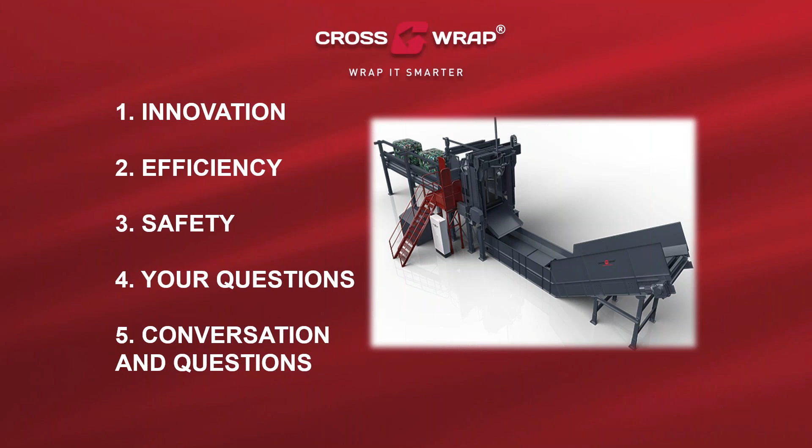So we got one question from the audience when registering: what is CrossWrap dewiring? I hope you will get the answer during this presentation.

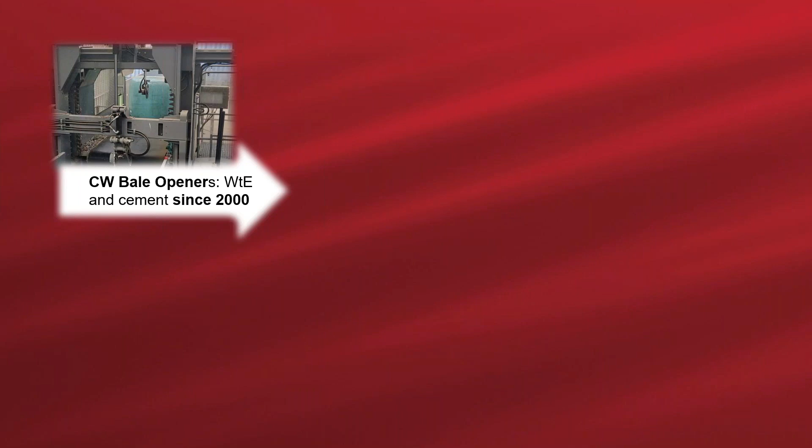Innovation. Let's go through a short history behind the dewiring. Since 2000, we have been delivering the CrossWrap bale openers to the waste-to-energy and cement industry. In these industries, our references are Intercement, Cimentas, and LafargeHolcim, etc. This machine opens the bales with wires and plastic.

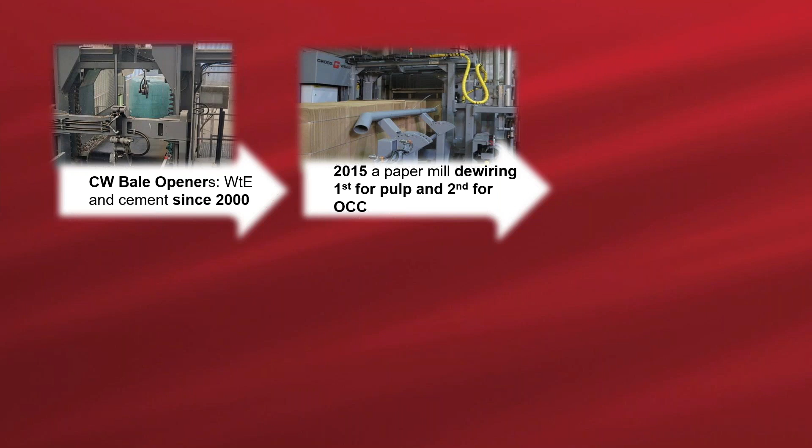Then in 2015, we got a request from a paper mill to do a dewiring based on our bale opener for the national pulp bales here in Finland. After that, we did the second machine for OCC bales, also for the paper industry.

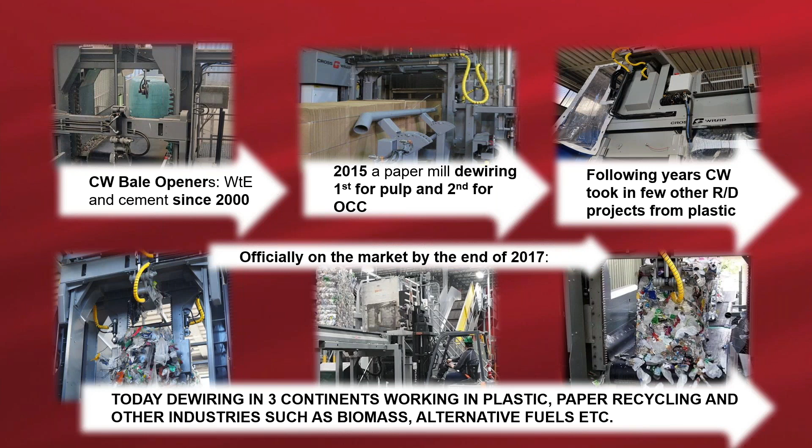After 2015, we took some projects in from the plastic industry. By the end of 2017, we had a full product, CrossWrap dewiring, on the market, opening and dewiring the bales for plastics recycling, paper recycling, and other industries such as biomass and alternative fuels.

Today we have this machinery on 3 continents. We can proudly call ourselves the leading dewiring on the market, since we are the only dewiring that is cutting, removing, and coiling the wires of the bale in 60 seconds, and we are highly recognized in many process industries.

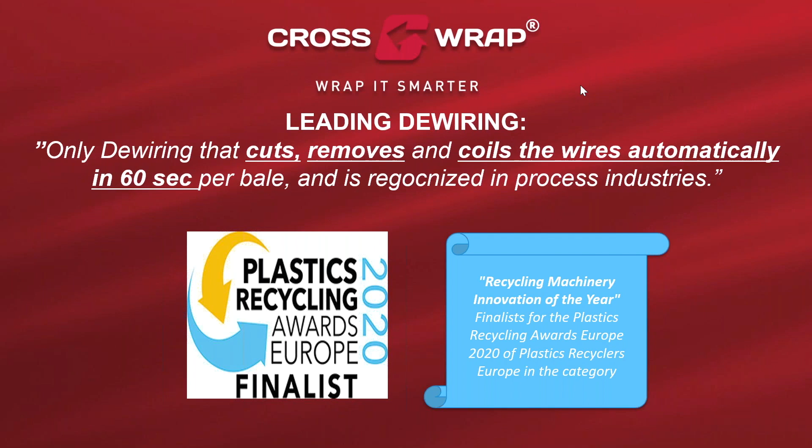Also, this year we are proud to be shortlisted as a finalist for Recycling Machinery Innovation of the Year 2020. Unfortunately, the final was postponed, but we are looking forward to that as well. Without further ado, let's have a look at the dewiring machine in action.

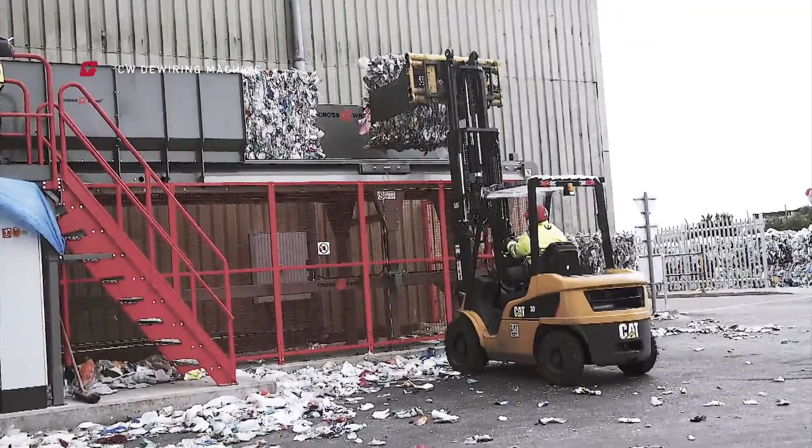This is an installation in England. Rainham Veolia is the client. So we feed the bales to the feeding conveyor, and we run the bale into the dewiring unit.

Then we have the grippers coming from both sides, taking hold of the wires. Then we start cutting with the slow rotating cutting blade in the front, starting from below the conveyor belt, ending above the bale. Then the grippers move apart. We run the conveyor, and the material goes further to the next process. Then we let go from the other side, and the wires get pulled to the other side, into the coiling unit.

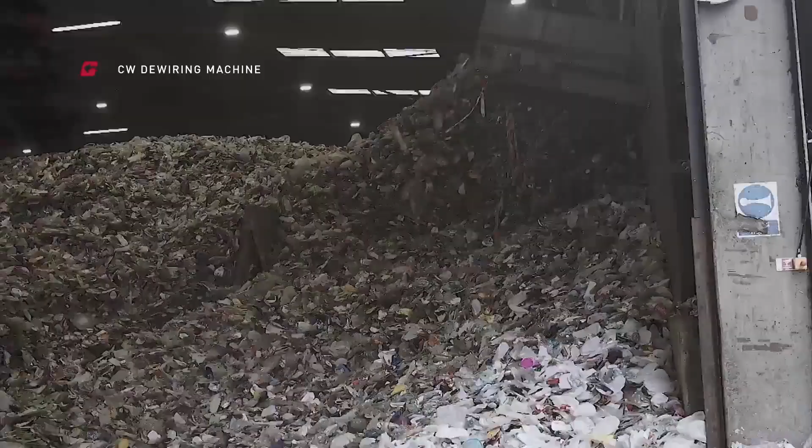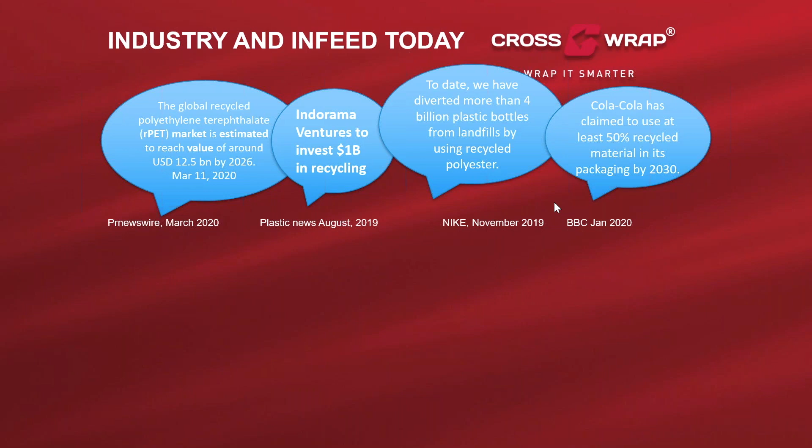Circular economy, social responsibility, and sustainability are here to stay. Brands and companies are making long-term commitments to plastic recycling. The lines, processes, and facilities of recycling are highly automated.

However, the feeding of these automated processes is often well behind in development, based on manual solutions or solutions adapted from other parts of the process. So now is the time for revolution in the feeding of these lines and processes, to the level of our industry. Let's see how it's done, Cross Wrap style.

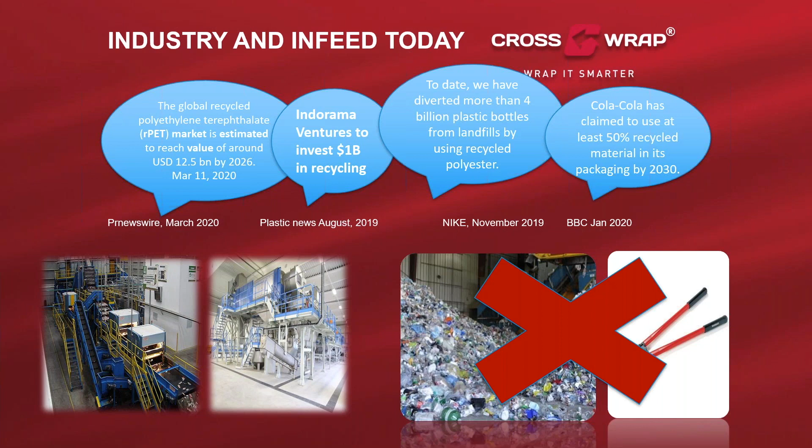So many times our feeding of the line may look like this, losing a lot of time in cleaning, manual cutting, manual handling of the wires, and so on. How about if instead it could look like this?

Efficient material handling, the consistent feed 24 hours for our running process. The most expensive time that we can have in the facility is downtime.

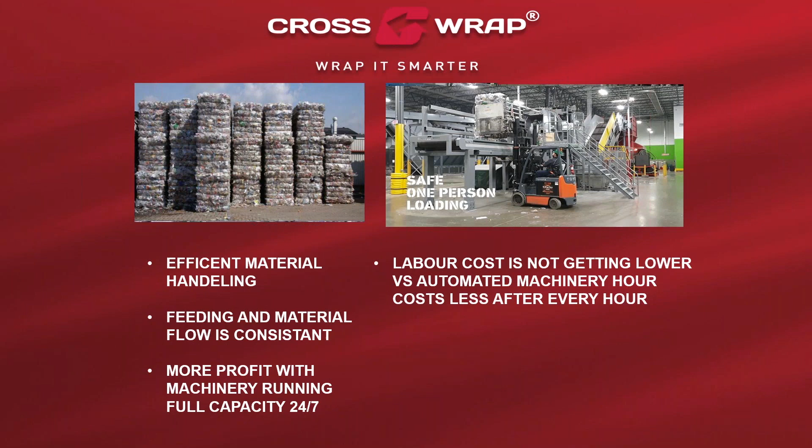As the current situation shows us, automation is the only way to go when possible, especially when talking about waste-based material streams. The working labor cost is increasing every hour, but the automated machinery costs less and less every hour. Now automation is possible for the dewiring process as well, with Cross Wrap dewiring.

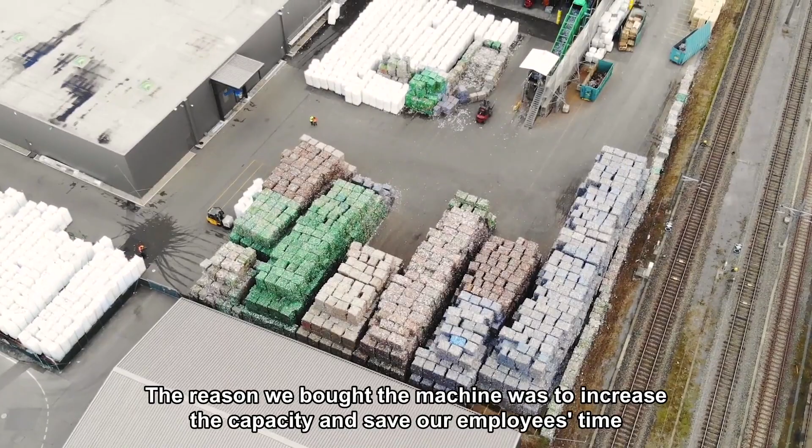But better than me telling you, let's hear from our customer why he made the investment for Cross Wrap dewiring. The reason for us to buy the machine is to increase capacity and save time in people.

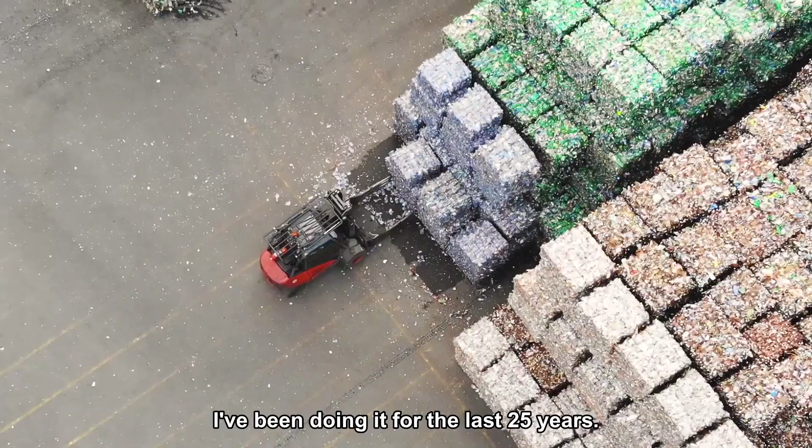My name is Casper van der Dunger, working for Poly Recycling in Switzerland, a PET recycling facility, as managing director, doing this for the last 25 years. We are actually at a new build plant since one year, and we are happy to integrate a recycling facility into preform production. So we make, in one location, old bottles into new bottles.

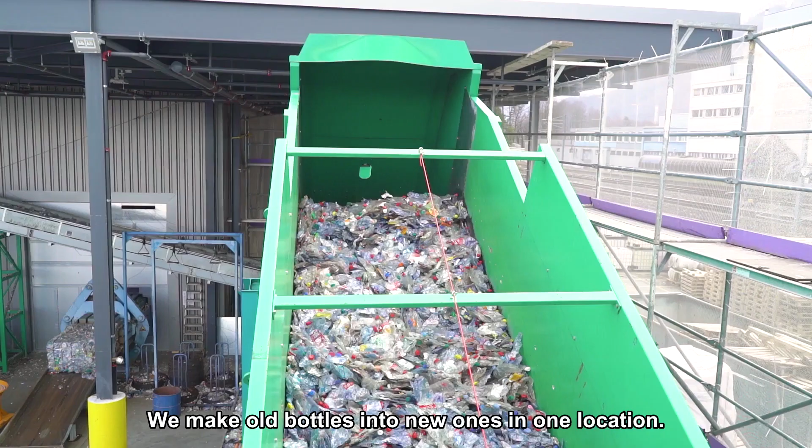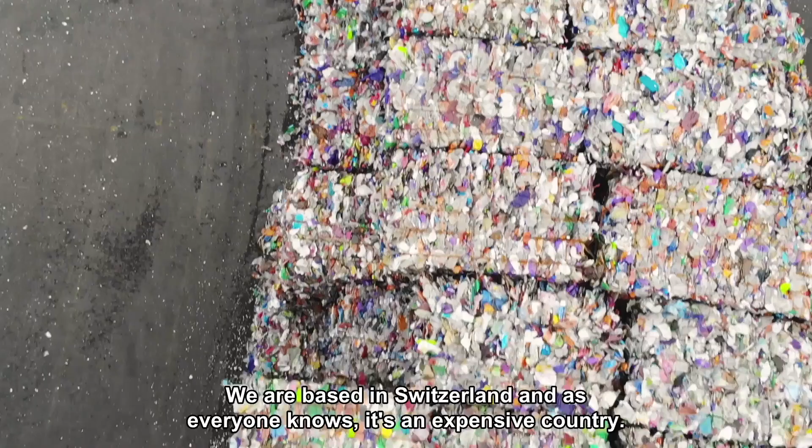It's a very unique situation because you go from waste into food grade materials. As we are based in Switzerland, everybody knows it's an expensive country, so we are focused on automating as much as we can in our operations. The dewiring system of Cross Wrap was, let's say, a point of choice where we wanted to focus on what it could add for our location.

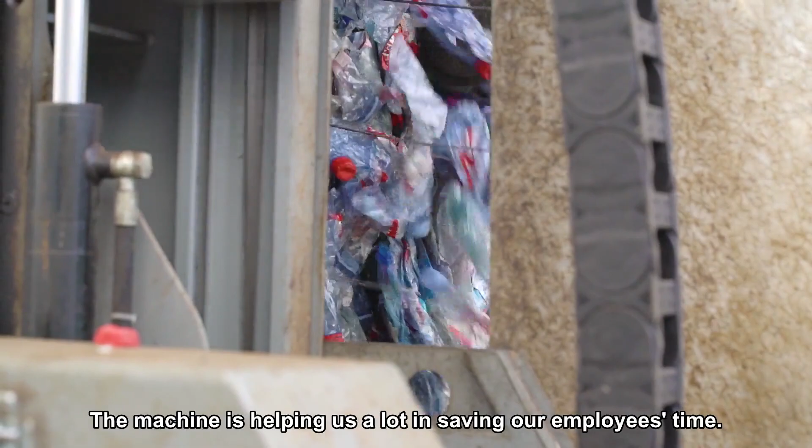The automation of bale dewiring gives the employee more time to do other important jobs, and the machine is helping us a lot in saving time for this. This helps us with the efficiency of operating a line 24/7 and focusing on making Swiss quality.

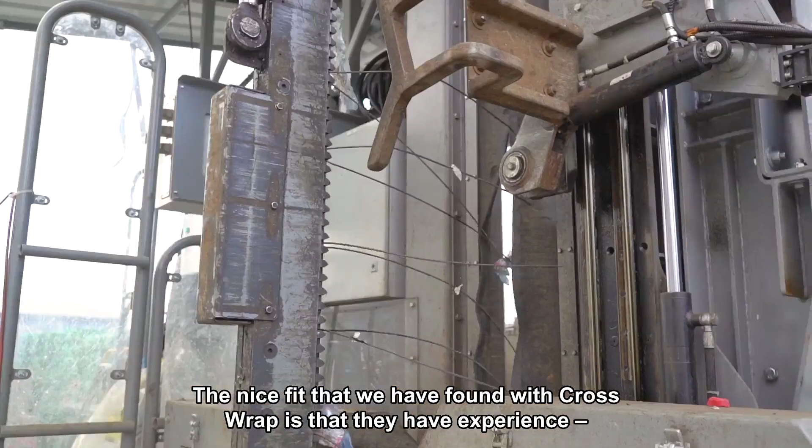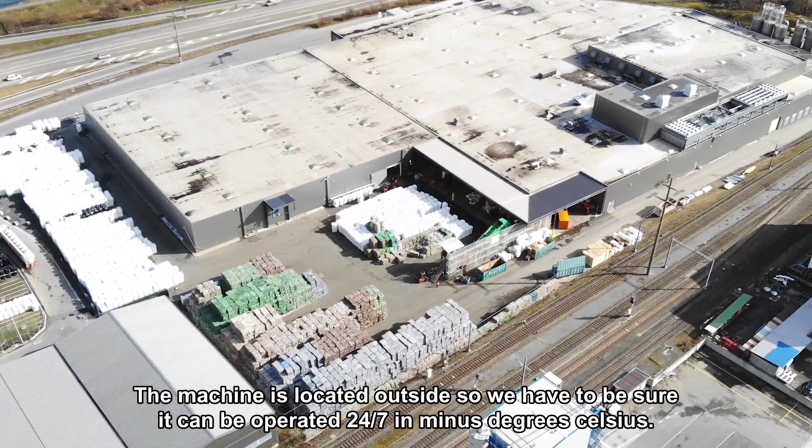The nice fit with Cross Wrap we found is that they are making machines and have experience in countries where there is a lot of snow. We typically have the machine outside, so it has to be sure that it can operate 24/7 at sub-zero degrees.

What I did like about the contact with Cross Wrap was that they were looking for value-added sales to the customers. They wanted to understand what we require, and we were, let's say, helped very carefully in achieving our goals. So, thank you to Switzerland for these comments.

Last but not least, at this presentation section: safety. Sustainability is a big part of the plastic recycling industry, and one part of that is social responsibility. And of course, the first responsibility is the employees you have on site, and the safety of those employees.

Here are the common tools used for manual bale dewiring, but those should be left to the previous decade. Let's put safety first - no more manual wire cutting and manual handling of wires, which cause several injuries throughout the year in the industry, giving a bad reputation not only to the company but also to the industry.

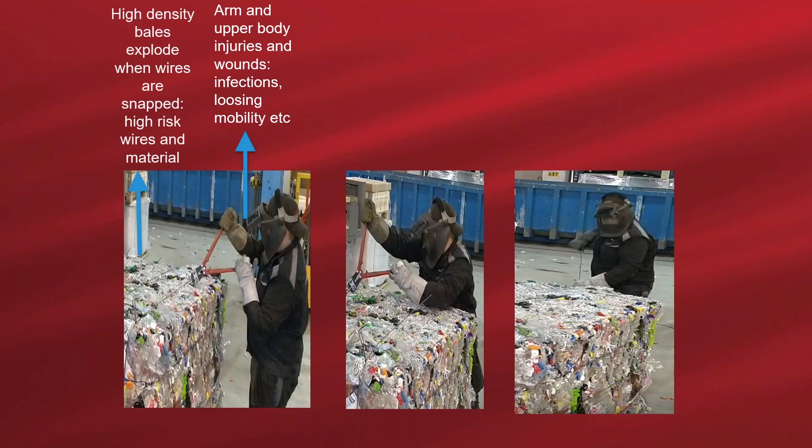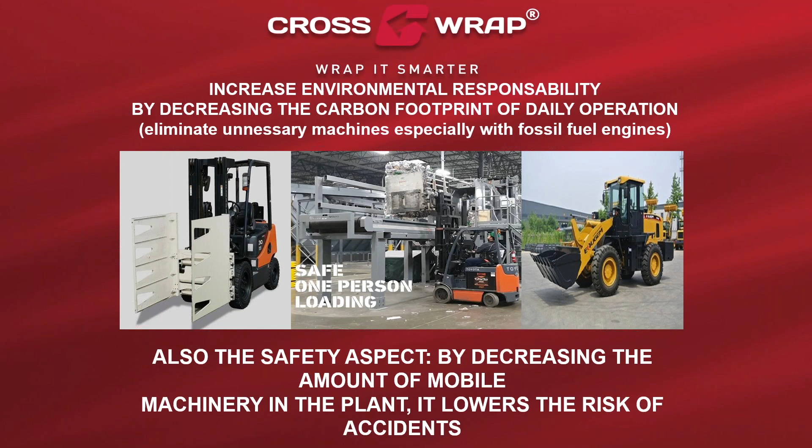Then from another point of view, when having non-automated or semi-automated feeding of our process lines, there is normally mobile machinery moving, mixing, and handling the material, causing safety risks, especially if the plant is in a hurry or behind schedule. And of course, the second thing is the environmental aspect of it all, that we are using fossil fuels. So let's increase environmental responsibility and social responsibility, and decrease both the accidents and the fossil fuel engines.

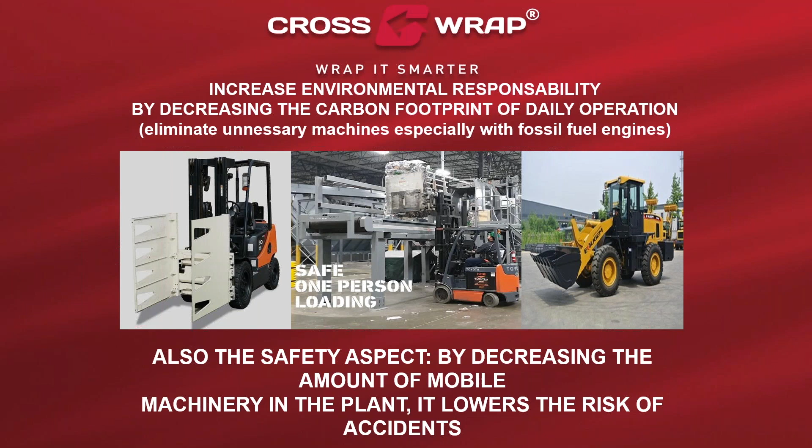All right, so that was just a bit to wake you up, and the rest of the presentation I will be answering the questions you already provided me in your registration forms.

So first up, there were some questions coming during this presentation already. What is the capacity? How efficiently do we remove the wires, and is there fire risk caused by the cutting blade?

The capacity of the machine is highly depending on your process, and we will match it. Now we can do the capacity up to 60 bales per hour. About the wire removing percentage, that in practice varies from 90 to 98%, and it highly depends on the quality of the bales. For us, the most important thing is to have the wires horizontally at the side of the bale, so that we can catch and grab them.

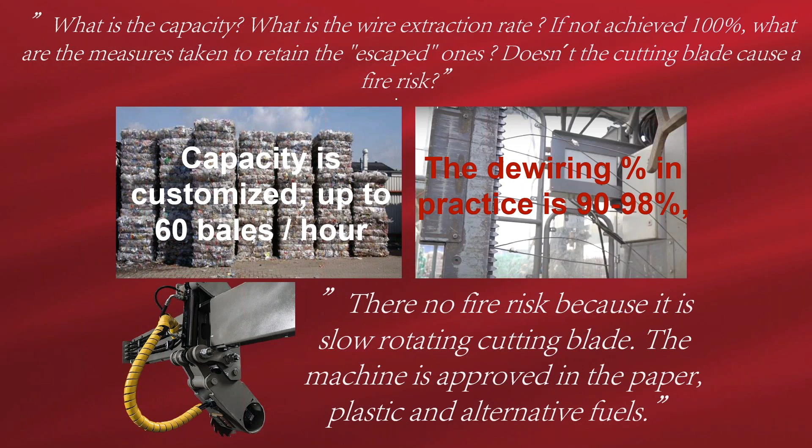Second thing about the fire risk of the cutting blade: no, there is no fire risk since it's a slow rotating cutting blade. Also, what proves our safety of the machinery is that this is approved in the paper and alternative fuels industry, where the assessment of fire risk is high.

And a new option, I like this question of: if not 100%, what are the measures taken to retain the escaped ones? So for this we have a new option. A metal detector is introduced to the CW Dewiring installation itself. Not only do we sense the wires going to the process, but we also can sense the metal that can be in your material stream inside the bale.

Then about different sizes and different kinds of bales, of course you get the bales where you get the best quality and best price. So how can we know? We can open them all. As some of you know, our first product to the market 25 years ago was the square bale wrapping.

These square bale wrappers we have with all the leading baler manufacturers. So we know the machines that make the bales that arrive to your plant. As long as the wires are horizontal, with these two different dewiring models, we can open your bales.

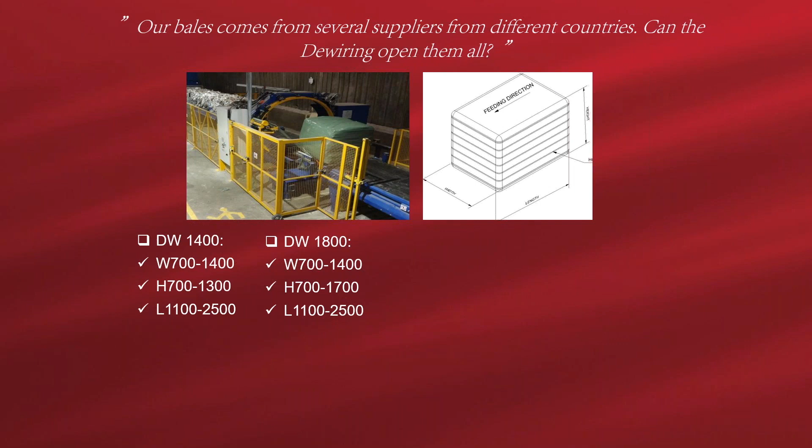And on top of that, as we know, there are different sizes of bales, but there are also different hardness and pressures in the bales. For this, we have developed an automatic bale hardness sensing quality to the machine, so that we can feed different types of bales in whichever order you want, according to your recipe for your product. If we put quality 1, 2, 4, 6, 7, we can do that and have a flexible, efficient process.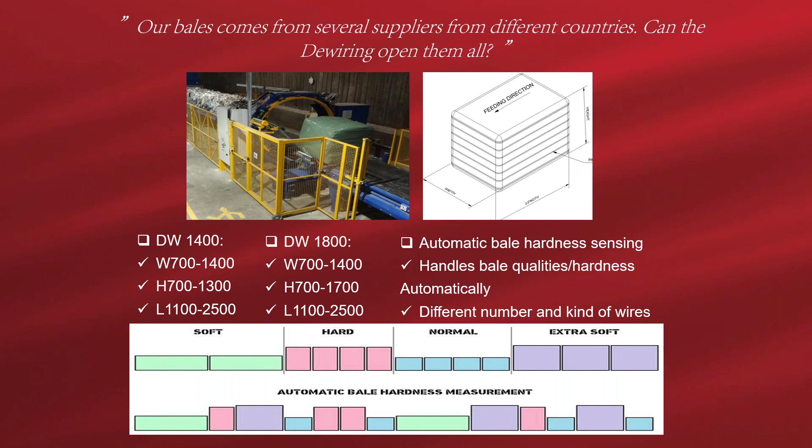Then there was a question: can it change from one product to another using the same unit, plastic and steel? Yeah, we can. This is programmable, and depending on the process, we can do that indeed.

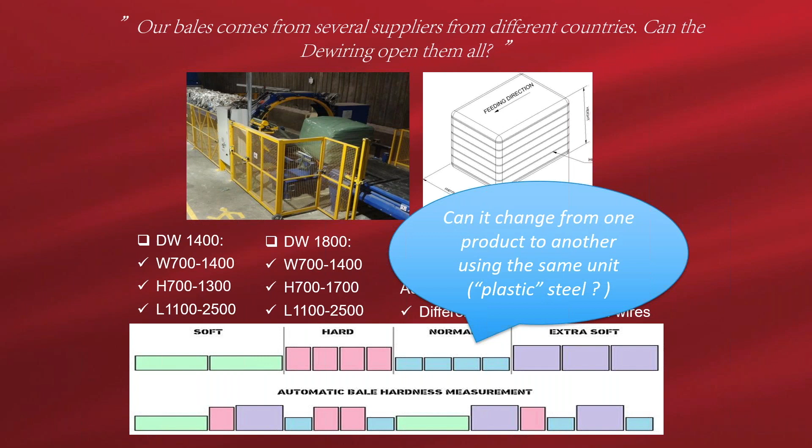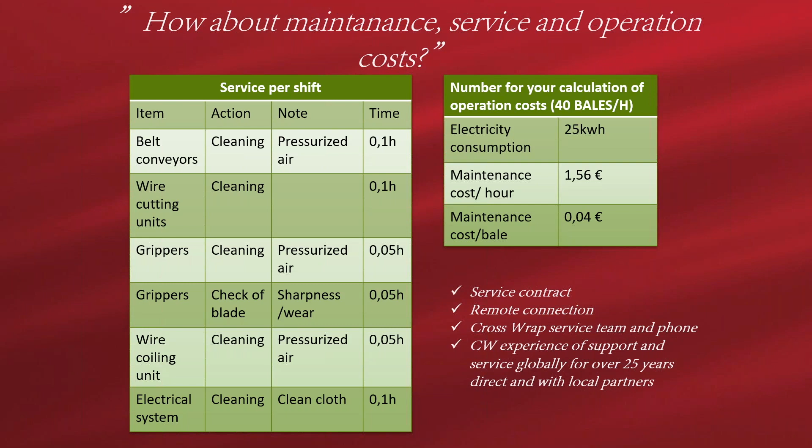Cross Wrap has the experience of supporting international clients for 25 years. We support the clients directly, as well as with local partners. We have a service team and a service phone. All units come with remote connection, so program and PLC related service we can do remotely from our home office as well. And service contracts are available.

A little bit more about service and maintenance, because it seems to be the hot topic according to your questions. So let's take the machine part by part. The main frame, as said, the main maintenance is cleaning and greasing.

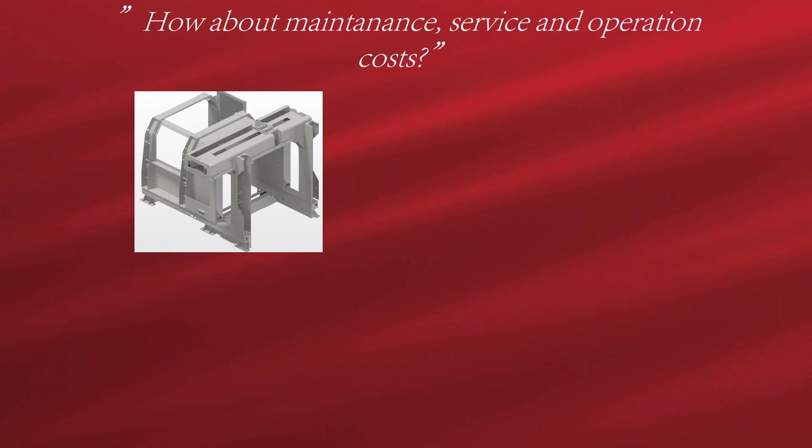The main frame is a laser-cut robust structure, minimizing littering and cleaning. The installation is easy and fast, taking 5 to 7 working days. And we do the factory testing for all of our machinery here in Finland, in our facilities.

Then we have the front cutter. Again, the main maintenance is cleaning and checking the sharpness of the blade. The design and material of the blade is optimized for minimizing the service cost. One blade can be sharpened 5 to 6 times. Normally our clients have 2 blades, one in use and one already sharpened.

The changing of the blade takes 5 to 10 minutes. It's a really simple procedure for any of your operators. But of course, the frequency of changing the blade depends highly on your production and material.

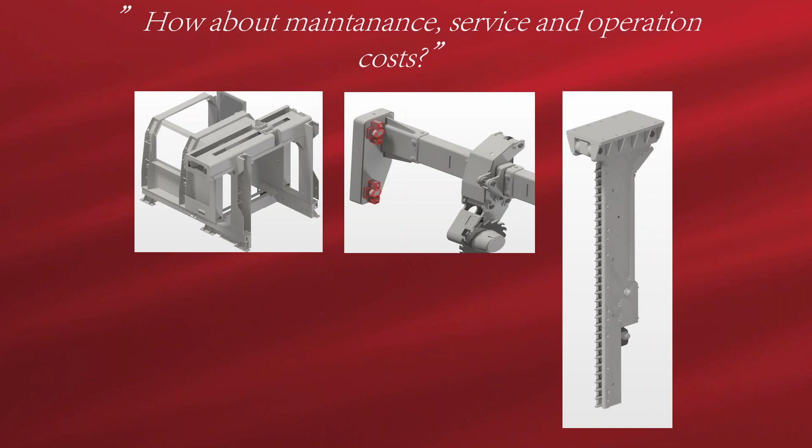Then the grippers. Grippers are patented. We have the patent for the grippers. The main maintenance is cleaning and greasing again, and checking the sharpness.

A nice thing for maintenance is that the spikes are individually interchangeable and replaceable. So we can take one spike from the top or below, where we don't get that many wires normally, and change it to the middle, where we always have a wire and where the spikes wear more.

About the gripper and front cutter booms, again, greasing and cleaning. We use heavy-duty steel rolls for the movement, so we have the same robust structure as forklift trucks. At least for me, I don't know a stronger structure than that.

Then for the coiling unit, last but not least, we hold the patent for that, and maintenance is cleaning and greasing. It is a protected structure, and in the design, one of the best qualities is that we do not generate any heat when coiling the wires.

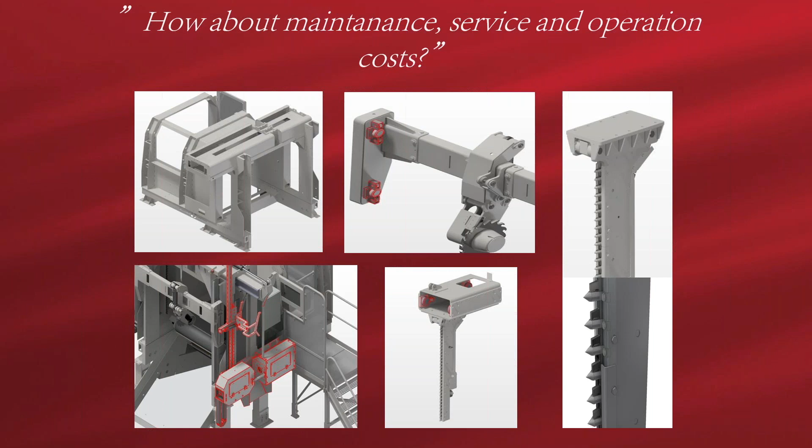We got a separate question about how often we change the cutting blades. As said earlier, it truly depends on your material. This question came from the cement industry. I know we're talking about SRF or RDF, alternative fuel, where the bales are not hard material. There we can say the blade can last around 5,000 working hours with a capacity ranging from 20 to 30 bales per hour.

But of course, if we look at the market, for example in the US, where we have high dense bales made with twin ram balers, where the bales are like rocks, the maintenance sequence for sharpening the blade is shorter.

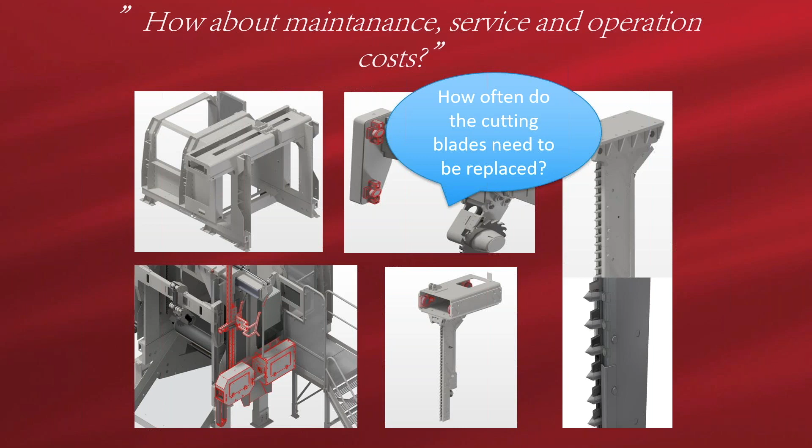Then came a question: our plant is limited with space, what is the footprint of the dewiring? The dewiring unit itself is less than 4 meters long and less than 5 meters wide.

Then we can add the feeding conveyor and output conveyor depending on your project and layout. The length of the feeding conveyor depends on how long a buffer you want for your process.

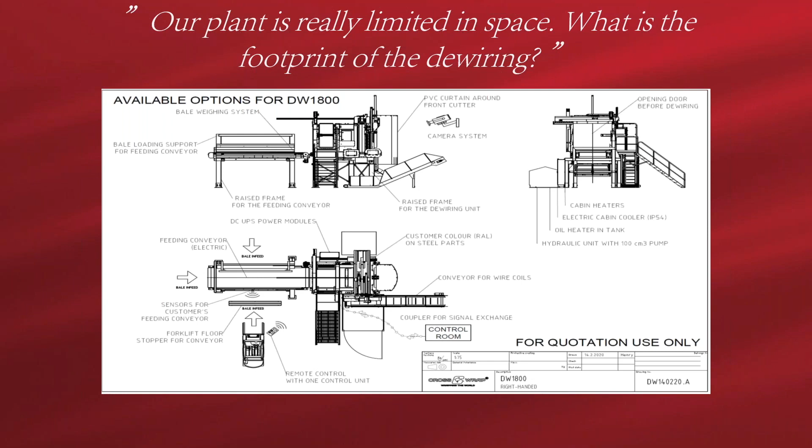Additionally, for example in this layout, we have a conveyor underneath where the coils drop. That is a good solution as well for efficient wire coiling handling after the wire coiling.

How easy can it be to integrate existing debaling and feeding system of a kiln calciner?

As said, our layout is highly flexible. We can have the dewiring directly towards the next process, or at an angle of 90 degrees. The feeding conveyor length is flexible, or in some cases, like we saw in the video from Switzerland, we don't have a feeding conveyor at all, but put the bales directly into the dewiring unit.

Please let us know your layout and we will make the best suggestion. Also, the height of the machine is individual according to your needs.

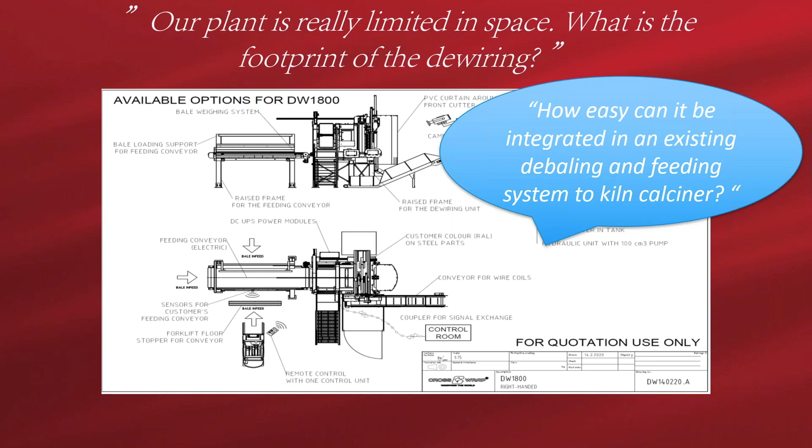All right, then about the PLC. We use the Siemens S7 1500 PLC. Here we can see the home screen. We have the Siemens TP1200 Comfort touch panel, standard is 12 inches.

That is easy to use, and it's an informative view. In the left corner we can see everything about our operations: how many bales we have opened, how many bales have been opened per shift, how many per hour, and so on. If we put the weight unit in as well, which we'll see in a bit, we can have that information there too.

All of our machinery come with a TOSIBox modem. With that, we're able to provide teleservice, remote connection, access for updates and upgrades, and the possibility to see the operation remotely from your phone, office, or home laptop.

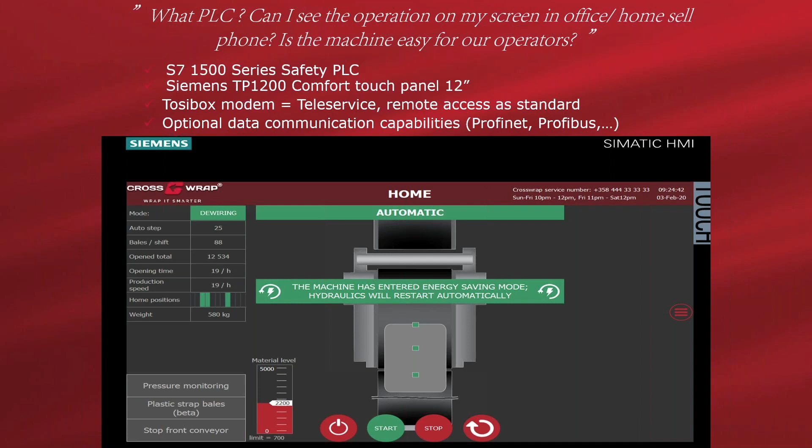Also available is the PN/PN coupler to connect the dewiring to the factory automation system in a flexible manner. And of course, also available, different gateways such as Profibus or Modbus, etc.

How clean are the wires when they come out, and what happens after that? Here is the 80% I mentioned—a reference from our customer. They used to have 5 containers per 2 shifts; now 5 containers has changed to 1 container.

To the coiling process itself, after that we can have a conveyor automatically taking the wires to a container, or you can have the container already under the place where the coils drop. And after that, instead of a conveyor, we can also have a shredder.

We got a question about this: would the dewiring system benefit from using a shredder to volume reduce dewired coils? Yes, especially when talking about mixed plastics. If we have different kinds of plastics in the bale, sometimes film plastics can be wrapped around the wires, so the whole coil can drop directly to the shredder and be separated. Yes, of course it's possible, especially in high volume projects.

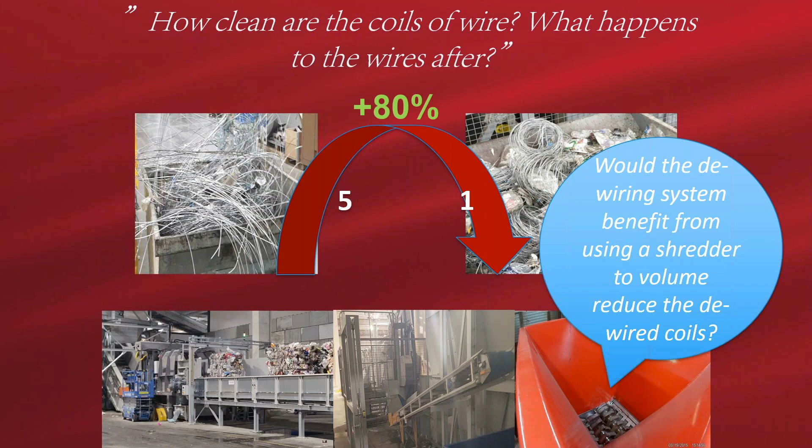Or another option is a small baler, so the wire coil drops directly into a small baler. But these are options we can discuss individually with all of you.

How is the infeed optimized?

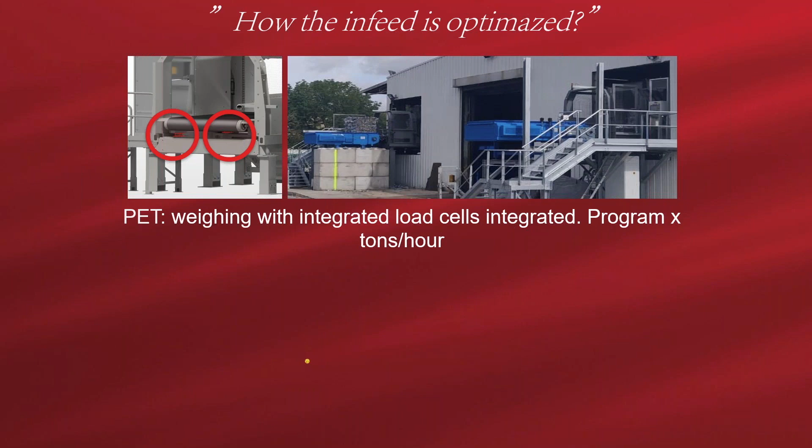Here is a project of a PET facility with integrated load cells for weighing, and the program is set to X amount of tons per hour that the next process requires.

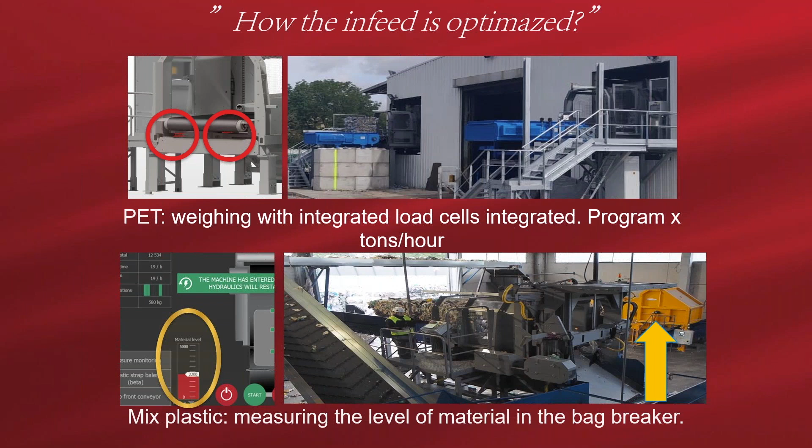Another option is having a level measuring sensor in the next process, like in this mixed plastic installation where we have it in the next bag breaker, measuring the level at all times. Here in the left corner is a screenshot of our home screen, where you can always see the material level of the next process, enabling the automation.

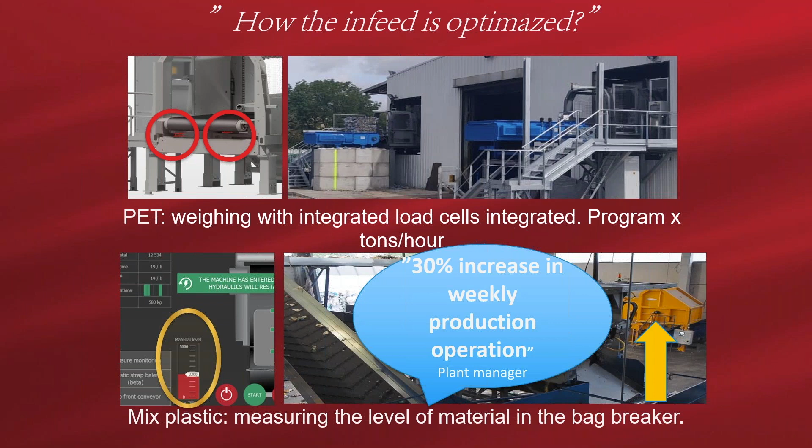Comment from this mixed plastic recycling plant's manager: they did manage to get a 30% weekly increase in production when running Cross Wrap dewiring.

We are almost done, two things to go. Putting machinery inside or outside, can we have a mobile unit? Yes, mobile units are available. Please let us know what kind of mobility we need from the machinery, if it's moving inside the plant or something else.

The machine has IP55 rating, meaning it can be placed outside, but we need a roof on top of it. The storage conveyor can be outside if wanted, without problems.

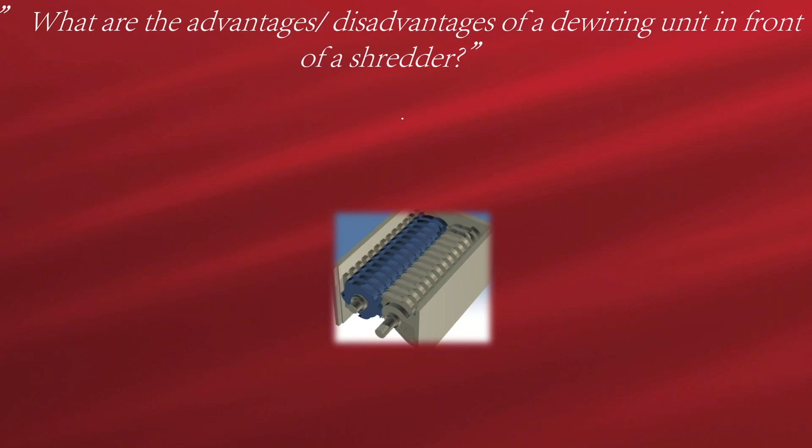Disadvantages and advantages in front of a shredder. This is the second to last one, bear with me guys, I've thought this through. Here we have any type of shredder. I'm not taking sides, shredders are amazing machinery. Here is our dewiring. Let's use an example of a PET bale feeding to the shredder.

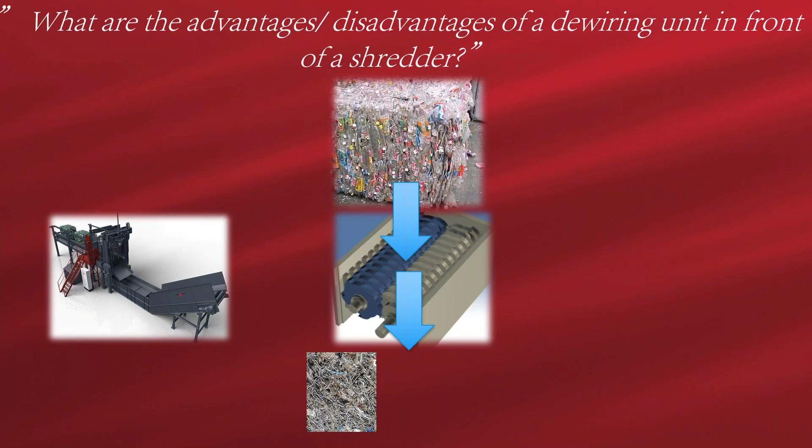What we get out is little pieces of metal wire. Firstly, metal wires cause maintenance issues in the shredder, but also these little pieces of metal wire are hard to detect from the material stream, causing quality issues and maintenance issues not only in the shredder but further along the process, costing money. We get maintenance costs and an angry maintenance manager, plus inconsistent material feed. When the bale is put into the shredder, it snaps the first wire - we get a tiny bit of material, then snapping the second and third wires, a bit more - and then we get a high peak of material flow when snapping all the wires, creating a highly unsteady material flow.

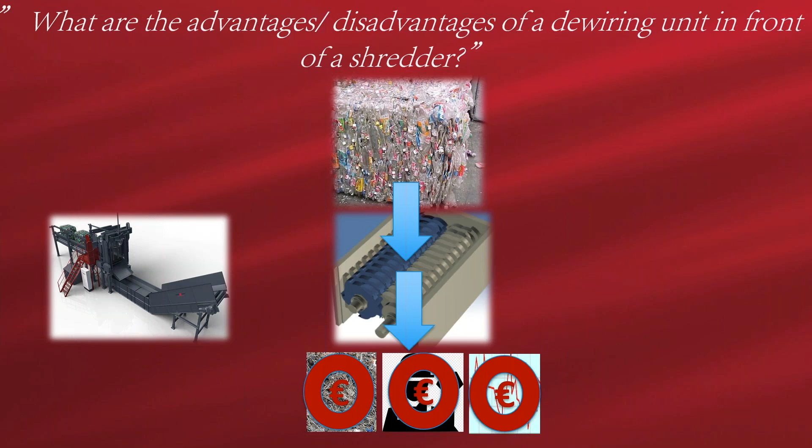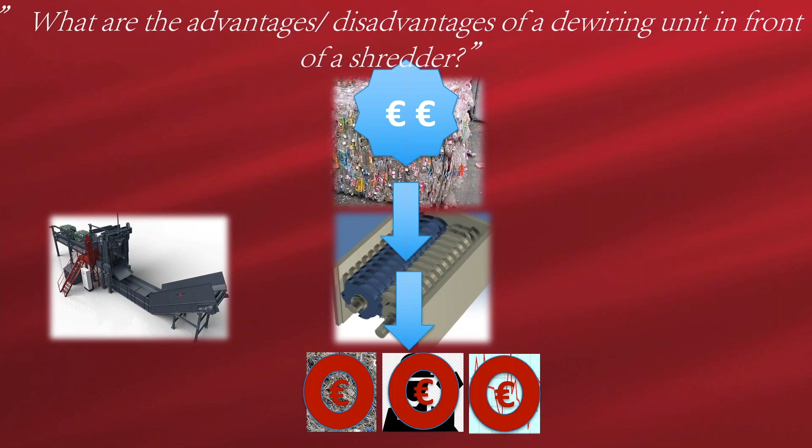The whole investment of a shredder is significant, because shredders are significant machines. All right, the other option is putting the same bale into a dewiring unit.

What we get out is wire coils, which have good recycling value, and the material can be shredded after dewiring with a relatively smaller and lower investment shredder, if wanted. We get a happy service manager without too much rush and cost, and we get a nice flow of good quality product to the line, with a steady flow of material. The investment is relatively smaller than the shredder alone.

But the third option is that we first put the bale through Cross Wrap dewiring, and then feed that to a shredder - especially for those already recognizing the problems we discussed when putting the entire bale into the shredder. So the solution is Cross Wrap dewiring in front of the shredder.

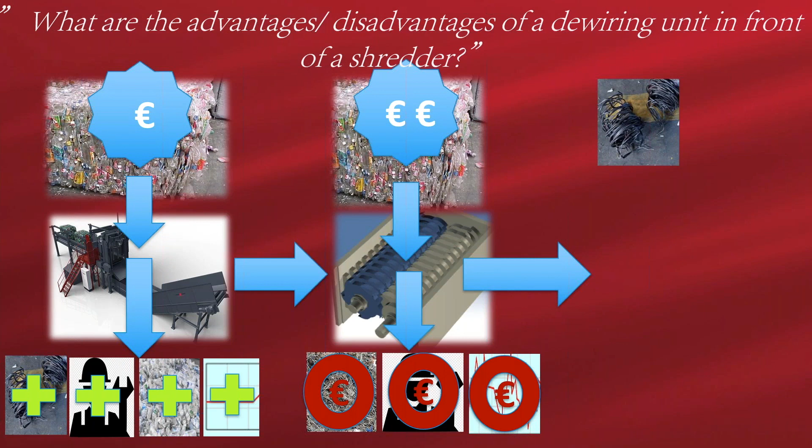Not only is the whole feeding process automated, but it also saves you a lot of alternative costs. So we get the wires with good recycling value, a happy maintenance manager with low costs, and a nice steady material flow. It's a bit bigger investment, of course, but when considering the alternative costs without dewiring, it's worthwhile to do.

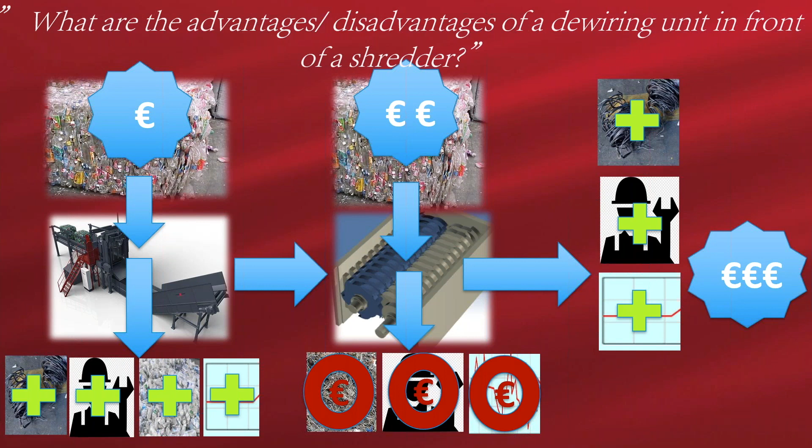Then the last question: what is the big difference between the paper industry's dewiring machinery and ours? Good question. At least to my knowledge, the paper recycling industry is the only other industry that has some alternative solutions for dewiring.

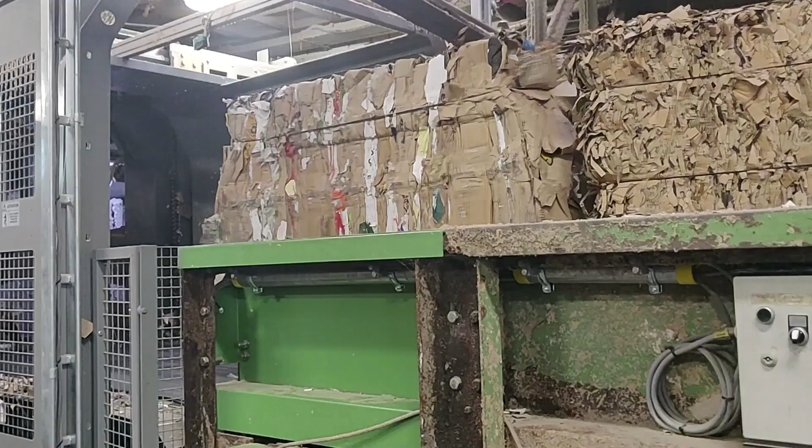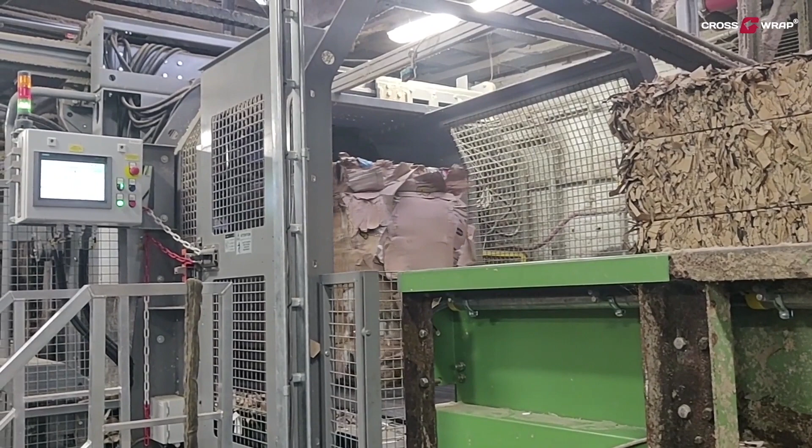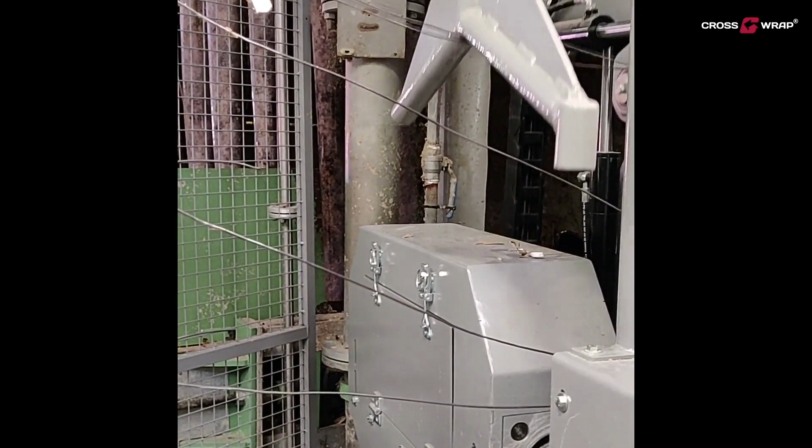Basically we use the same type of unit. The difference is, and the beauty of our machine, is that we cut the wires from the front, which makes the wires stay behind the material flow. We are not trying to cut below the bale, which causes a significant loss of cut wires. We also hold onto the wires while we cut, and after that, while we're holding on, the material moves forward and our wires stay behind the material flow, giving success in separating the wires.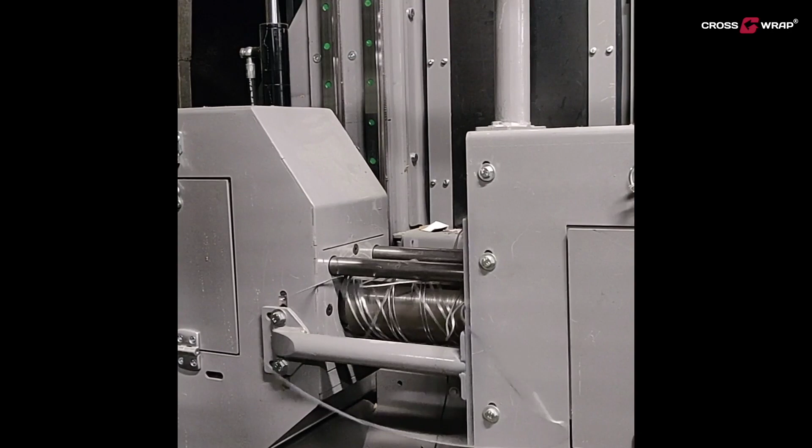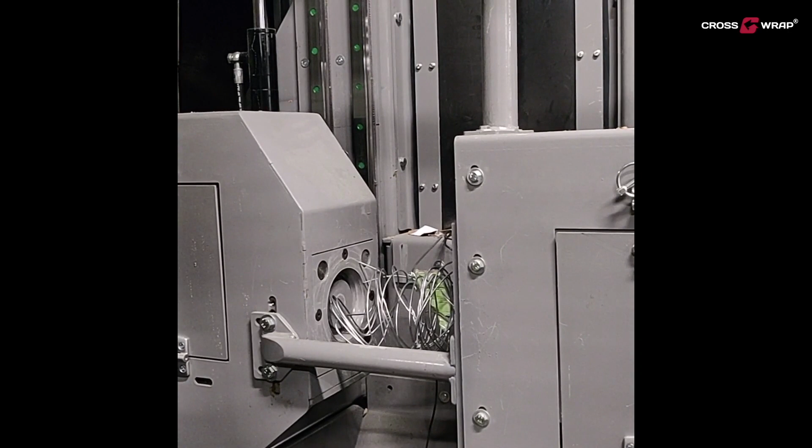The beauty of our coiling unit is that we coil the wires of one bale at a time, not several bales. So it's quick, maintenance is low, and we don't get any overheating problems with the wire coil system, unlike what I've heard from the baling industry.

Also take note of the belt conveyors that we use. These conveyors take the best care of our bales and have low maintenance cost, compared to when using other types of balers that result in higher maintenance costs.

That was that, guys. Wow, that was 43 minutes.

So once more, here is our sales team contact information. The person who was missing from our introduction was Luba Stevanova. She is in the audience and taking care of Russia and Russian-speaking countries. Also, the great person behind all of us is Jussi-Pekka Räsänen, our sales support, doing a great job supporting all of us. Our email addresses are

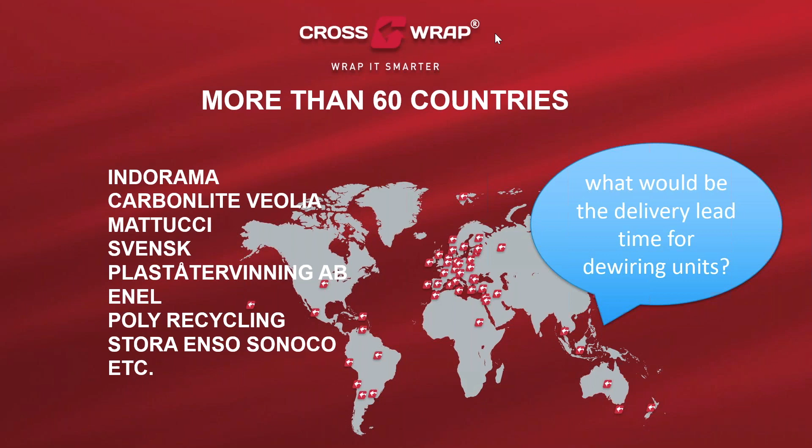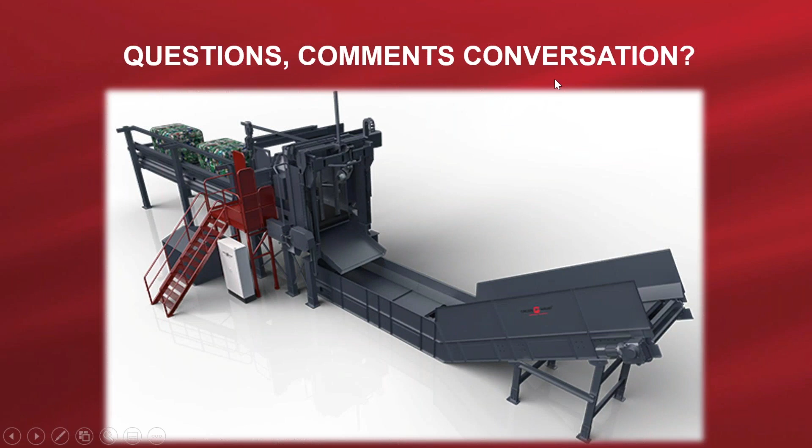And now would be the time for questions, comments, and conversation. We can start by taking some of the questions from here.

First of all, when the bale comes in, we have sensors measuring the bale and taking it in. There shouldn't be a situation where, how often would I say never, if the bale is to the right dimensions. One important thing I forgot to mention is that when putting the bales on the conveyor, it's important to put them with a little bit of a gap. If we put the bales on the conveyor without any gap between them, there's a possibility that the sensor sees just one long bale, and then there can be a problem. But when putting the bales in the right way, there is no problem.

Was there somebody from the sales team that wanted to comment on this? I heard somebody putting their mic on.

Yeah, I was about to say, you said it exactly correctly: if you place the bale correctly on the feeding conveyor so that the wires are horizontal, then the dewiring works. The common reasons something gets stuck, which shows the intelligence of the machine, are if you don't place the bale correctly, or if the discharge conveyor is full. Those are maybe the most common reasons I know of. Or, as you say, if there are some pieces holding bales together so they come as one piece, making a very long-looking bale.

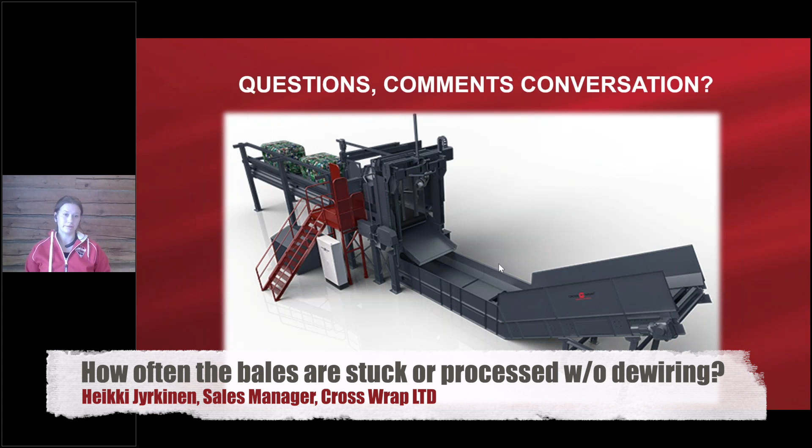Exactly, thank you Heikki for that. Yes, we can dewire textile bales, and as said, we do have the solution working in various industries. Textile bales are easy to dewire. There's no problem whatsoever, because textile as a material is favorable and normally has a good bale shape.

Yes, of course, because then in transportation you get a pure material, as said in the previous slide, especially when talking about mixed plastics, where there's a possibility that there's plastic around the wires that we remove, which ends up in the coil in a small amount, but still. So if you do shred it, you can 100% separate the plastics out of the coil. So yes, I'd say there is value added in that process.

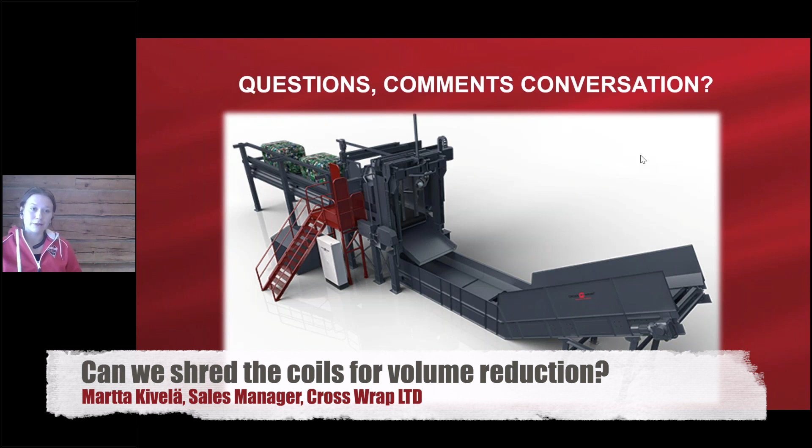Can we receive the presentation and videos after? Yes, you can. All the videos can also be found on our website and our YouTube channel. Just type YouTube Cross Wrap, go to all videos, and you can see all of these videos there as well, and more.

And let us know if you want more about a certain material, like more about mixed plastic, or if you want PET material, PET videos, and so on.

Well, it probably depends highly on where you are from, where your plant is at the moment, where you're putting your wires now, and what the value is when you do, and whether those wires are clean or not. Of course, the investment return comes from the slide I had, the 80% saving, because if we have the wires now outspread as just long wires, the reduction with coiled wires is 80% according to our customer, who used to use 5 containers per 2 shifts, and now it's 1 container. So already there we have a reduction in transport.

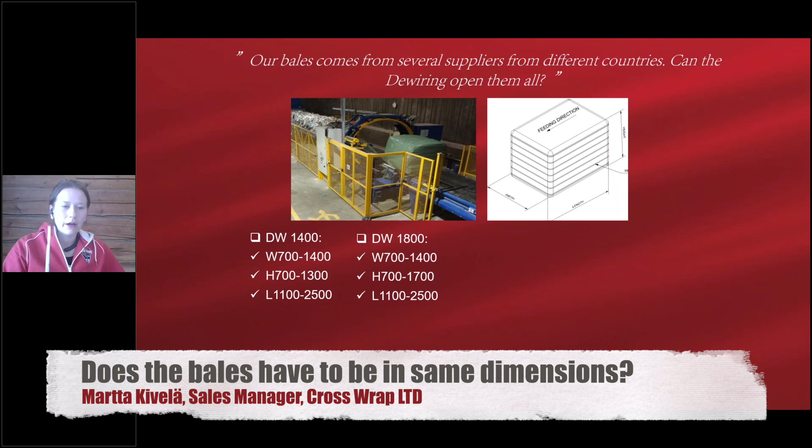It doesn't have to be the same dimension. I can go back a bit to the presentation to show you a possible feeding stream. As said, there are the dimensions: width, height, and length when wires are horizontal. If your bales are outside of those dimensions, please let me know and I will comment on that later, because that likely means the bales are manually done or made with a vertical baler, but these dimensions stand for most of your processes.

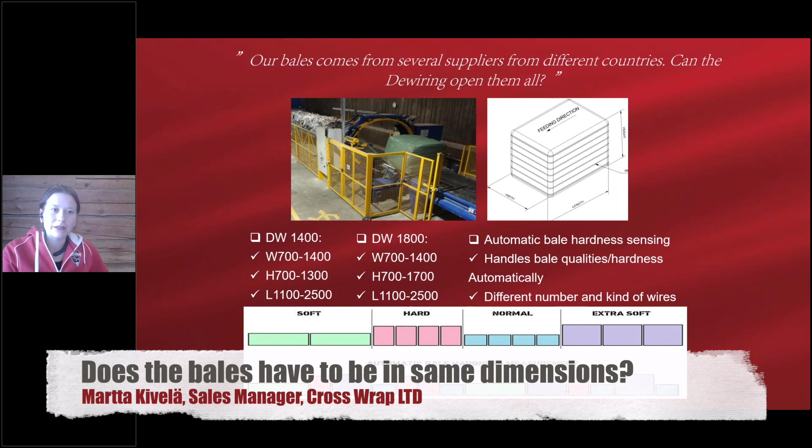What UK references do you have on what materials? In UK Islands, in total of machinery, we have over 100 units running. Of the dewiring itself for the plastic industry, we have Veolia, Rainham in London.

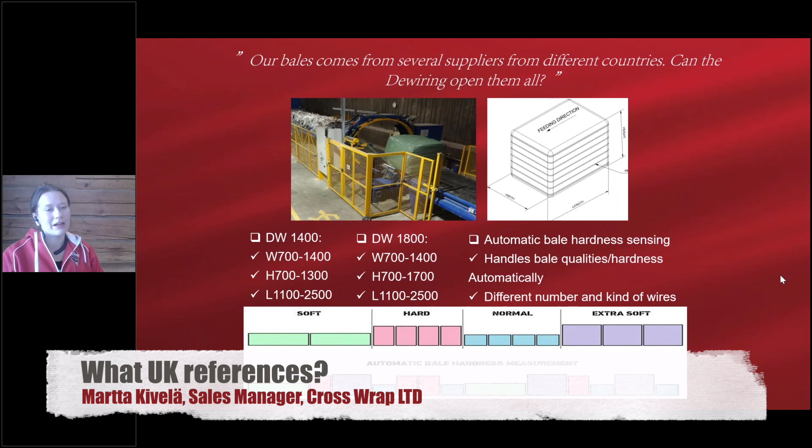But we are highly looking to install at least a few machines more this year, I believe, because of the payback of the machine. If we take, for example, my sales area of Italy, which is not the cheapest, but not the most expensive, there we have calculated with many customers that the payback is 1.5 years.

It depends. If our machine is high enough, we can put just a container under it - that's the most common, maybe most simple solution. We have just a container under the machine, so the wire drops directly to the container, and when it's full, you change to a new container.

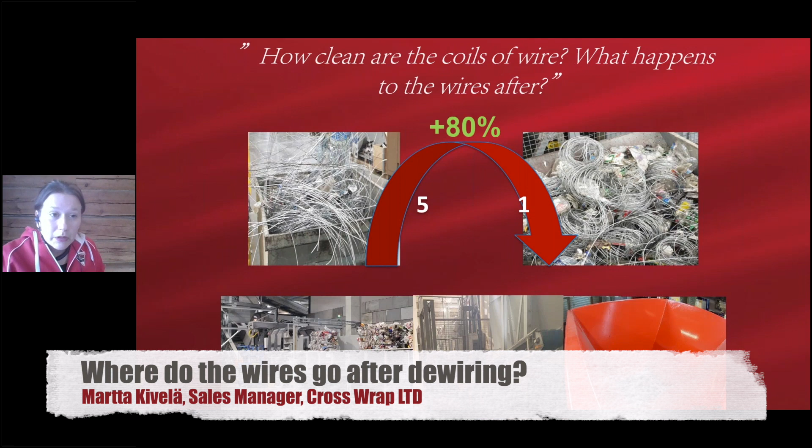If there is a request for other kinds of solutions, one solution is more automatic - we do have a conveyor under the spot where the wire drops, and the conveyor takes it to the container again, or a small shredder, or a small baler, for example. It depends, but those are the options we are seeing at the moment and doing.

How much distance? Depends on your layout, really. For example, we have made some projects where we have a debaler, and the dewiring unit itself is put directly on it. If the debaler starts here, we have the sliding plate just there, and the material goes to the debaler directly. Or there can be a conveyor in between.

It depends a lot on which kind of debaler you might have, what kind of capacity the debaler has, and the space available. Good question. Okay, that machine supplier that does promise you 100 percent...

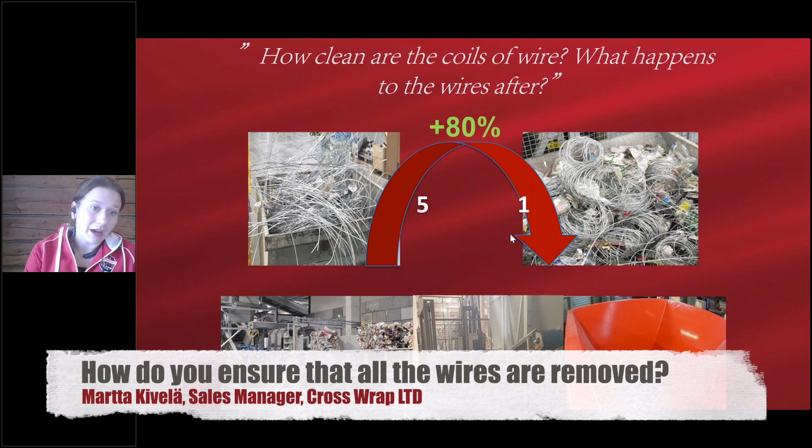Send me his contact, I will go and work for him if that's true, but we do not believe it's 100% true. Of course, to get the highest range of removing the wires, the new option we have just introduced is the metal detecting, and that is a project we are delivering as well. So it's a ready product.

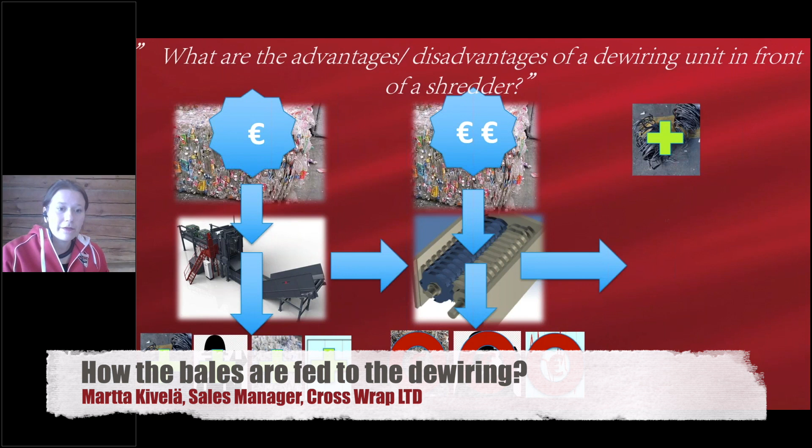The bales are put to the bale feed conveyor normally with a forklift. The feeding conveyor itself, the length varies depending on what kind of buffer we want for the process. So let's say 5 meters gives us, depending on our bale size again, around 3 bales. And if we put 12 meters, we can get the whole capacity of an average washing line to a feeding conveyor. Here we can see the 3D model.

And for example, in the Switzerland video, as I mentioned earlier, there is no feeding conveyor. So if it's low capacity, but we want efficient feeding, we can just put it directly to the dewiring without a problem. So here we have the 3D.

In the left corner, there is the feeding conveyor. In this case, the bales are fed from the left side of the line, but we can also make the design so that we can feed the bales from the right side or from the end of the conveyor. So whichever suits your operation the best, we will do that.

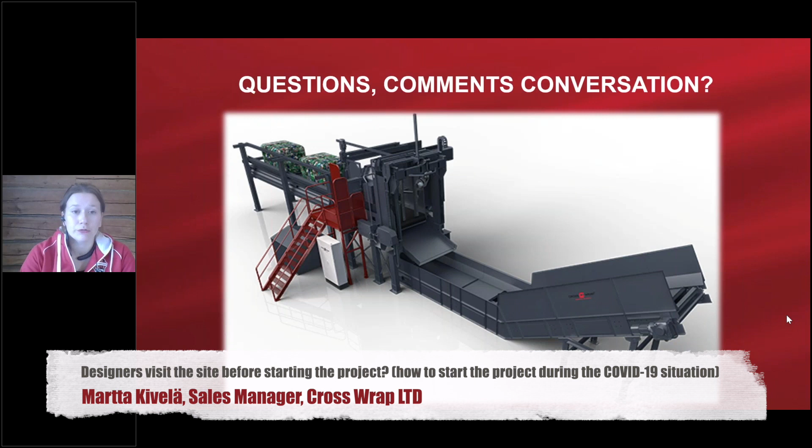Our sales managers, at normal times, visit our target markets every month, almost, depending on the project load, and we are happy to visit your sites when this situation does get easier. But before that, we are happy to arrange Microsoft Teams conferences, just you and us, or Skype or Zoom, whichever platform you desire.